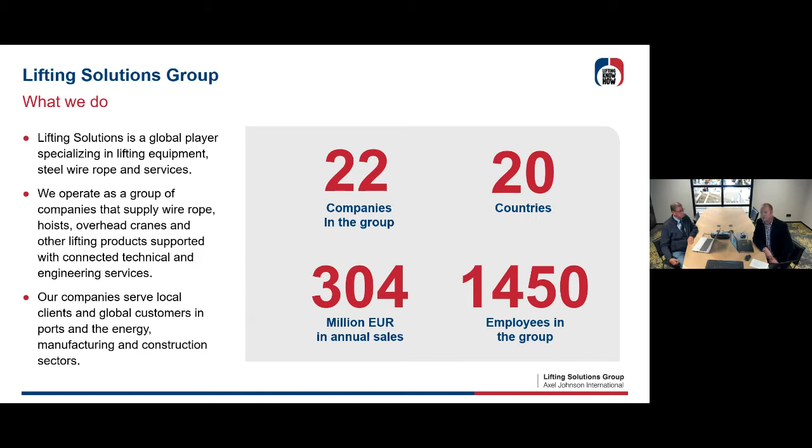Here you have some numbers. Like I said, we're a global player, specialized in steel wire rope, lifting equipment and inspection, etc. We operate as a group of companies, and we serve local clients and global customers in several industries. As you can see, 22 companies in 20 countries, etc.

Since the last webinar we increased our number of companies, and we acquired a couple of companies in Australia, 5 pieces, so we're growing and growing, and we have very good coverage, almost worldwide, on lifting solutions.

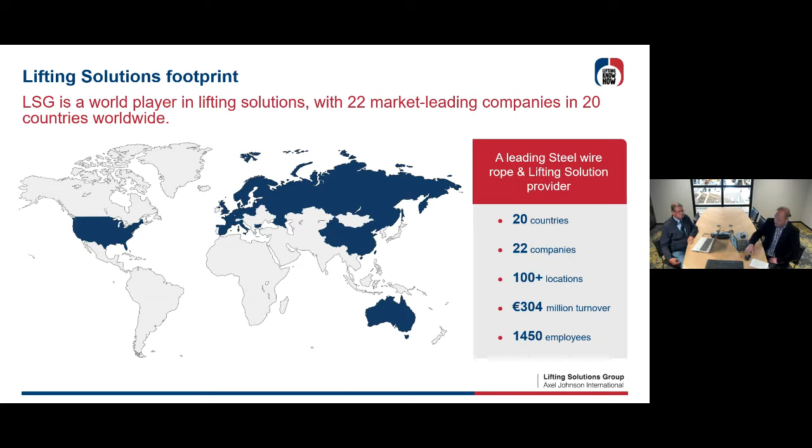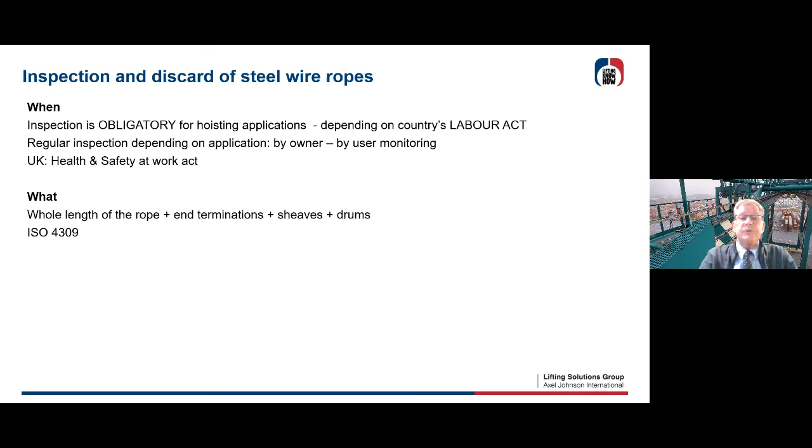Also the end terminations, he has to look at the sheaves and at the drums. And one very important lead into this is the ISO 4309. This is a standard procedure we're going to talk about for the coming 20 minutes.

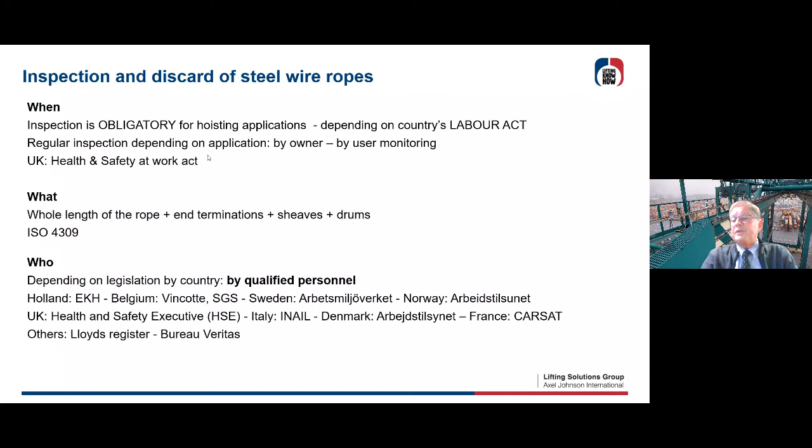Who has to do this inspection? That depends on legislation by country. It has to be a qualified person who knows about the different discard criteria in its country. In Holland, it's EKH. In Belgium, we have Vincotte, SGS. In Sweden, you see different inspection companies responsible, also in the UK, Italy, Denmark, France, and so on. For some applications, you need an inspector from Lloyd's or Bureau Veritas. So it all depends on who is going to do the job.

Now let's talk about when. We're just reading what's written in the ISO 4309. You see requirements covering the application of the country in use. In some countries, like with tower cranes, you have to do it every 6 months or every year, and so on. It depends on which country you need to apply your discard criteria.

The type of crane and the environmental conditions in which it operates - is it a container crane or a tower crane or something? You also have to look into the classification of group of mechanisms, how many times you're using the crane, the loads, are you always going up to the maximum load, and so on.

You're going to look into previous inspections, because sometimes you have a history of a crane, so that is important. The experience from different inspections, or from comparable cranes. The length of time the rope has been in service - if you see a discard coming up, perhaps you need to move on in your number of inspections. And the frequency of use - sometimes a crane hasn't been used so often, but in recent months or years you use it more, so then you have to increase the inspection frequency.

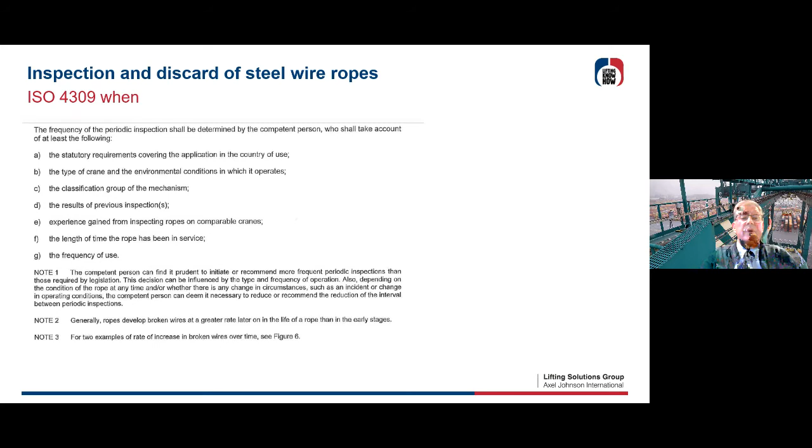So this is when. What are you going to inspect? Well, there are several modes of inspection you need.

You're going to first count the broken visible wires on the outside - this is a visual inspection, looking for fatigue wire rope breaks, counted on the outside. Or you can lose metallic area, which you can measure by visually measuring the diameter of the rope, the decrease in rope diameter.

You can also look for broken wires on the inside, but that's done later with magnetic rope testing. You look for fracture of strands, corrosion, deformation, mechanical damages - sometimes accidents can happen - or heat damage, like electric arcing that could damage the rope. So you need to inspect the whole rope length and also the terminations.

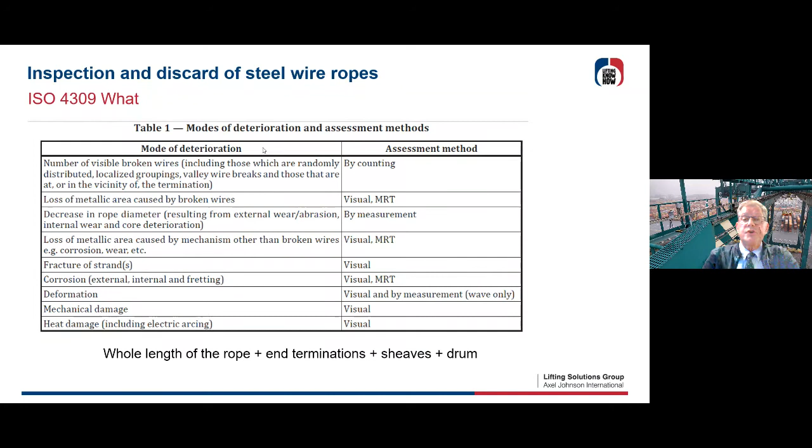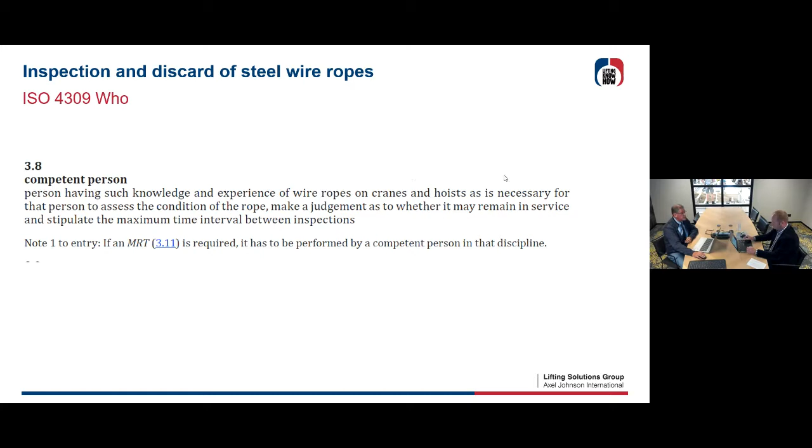You look at the sheaves and also at the drum. Don't look only at the rope, look at the whole application situation. And who does this? Once again, it has to be a competent person knowing his things about inspection, having experience, knowledge, or having acquired the learning of how to do this very important exercise in safety.

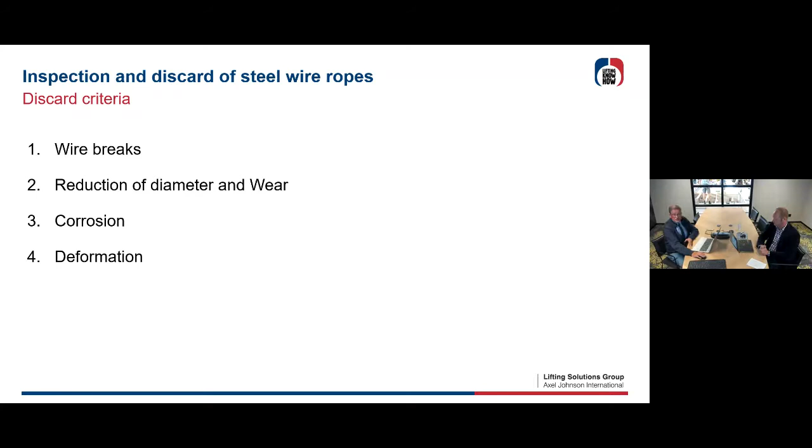Now let's talk about the visual inspection. We're going to look outside the ropes, and we need discard criteria. We look at wire breaks. Second discard criteria is the reduction of diameter and wear of the rope. You sometimes have corrosion - not often, but it could be important in some cases. And you could have deformation of ropes running around sheaves, from shocks or something. Let's look into that closer.

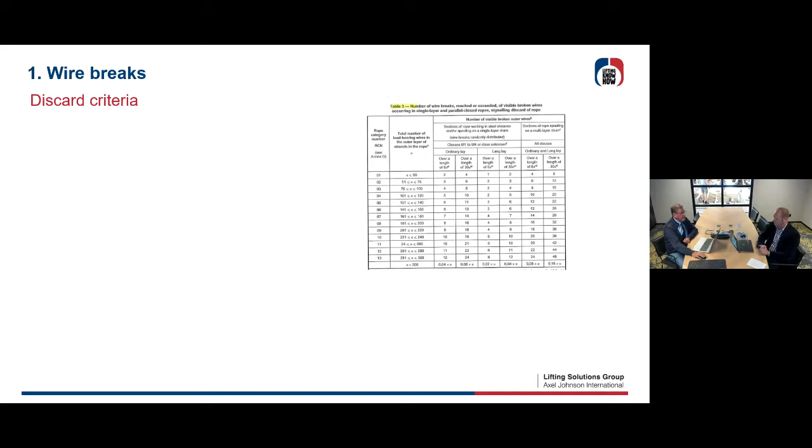So the first criteria are the wire breaks. You have a table in the norm that gives you the discard criteria - the number of wire breaks you can have in your rope before you have to take it out of service. The ISO 4309 lists two criteria: you count the number of wire breaks over 6 times the diameter of the rope, and you count the number of wire breaks over 30 times the diameter of the rope.

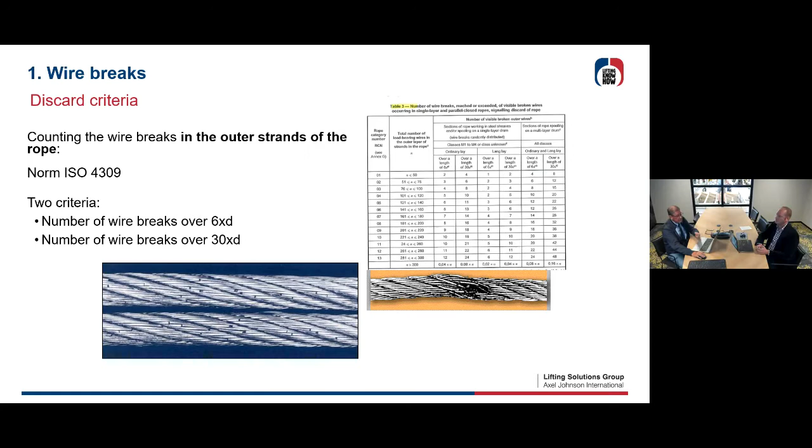But if you have normal wire breaks spread over your rope, then you just count them over 6 times D and over 30 times D.

Then you look closer into the table here, the discard criteria. On the left is the rope category number. Every type of rope is classified into a rope category number. What is the rope category number? Well, that's easy - it's the number of load-bearing wires in the outer layer of the strands of your rope.

So if you have a 6, 8, 9, or 10 stranded rope, you just look at how many wires are in the outer strands. For a 6 times 36 standard rope, you end up with 216 wires in your outer strands, so it falls between 201 and 220. Your rope category number will be number 9, so in the table you look at number 09. That's the rope category number.

The second part, the green part, is just for ropes running on classifications of applications M1 to M4, and on a single layer drum. So if you have a rope running on a single layer drum, then you have to look into the green part.

In the green part you have a classification for ordinary lay - you remember I explained what ordinary lay is, or Lang's lay. Then in ordinary lay, you have the numbers of wire breaks till discard over a length of 6 times D and 30 D.

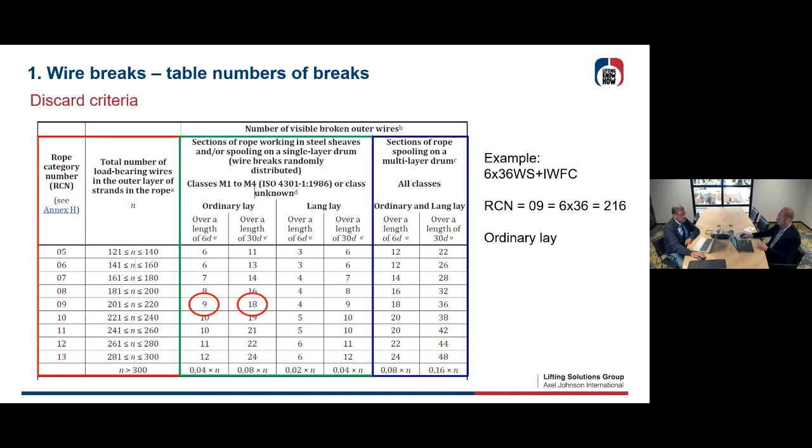Okay, so this is what has been put up as discard criteria for the number of wire breaks in your rope. There are some footnotes into this norm - you have to look into that closer.

The most important one is footnote D: twice the number of broken wires listed may be applied to ropes or mechanisms whose classification is known to be M5 to M8. So you can double up the number of broken wires before discard if you have an application with a classification of M5 to M8. You double up the figures.

Very important also - this norm is written for ropes running on steel sheaves. There is no norm yet for plastic sheaves, though perhaps someone will come up with one. So this is all done for steel sheaves.

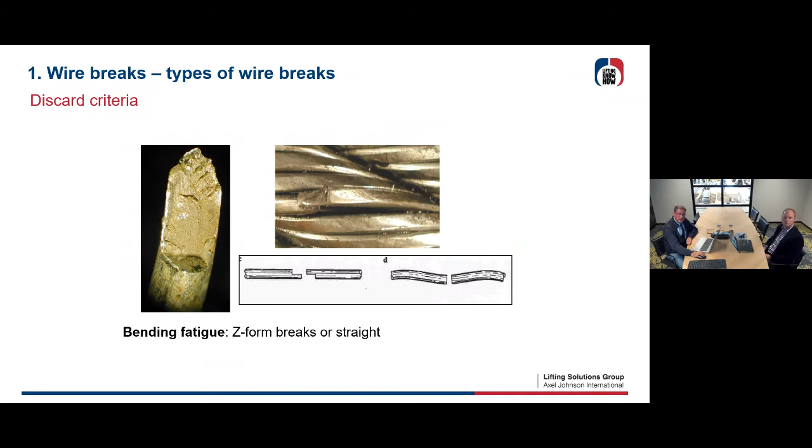So let's see about some types of wire breaks. A wire break can look like this - it's a Z kind of break. This is all fatigue.

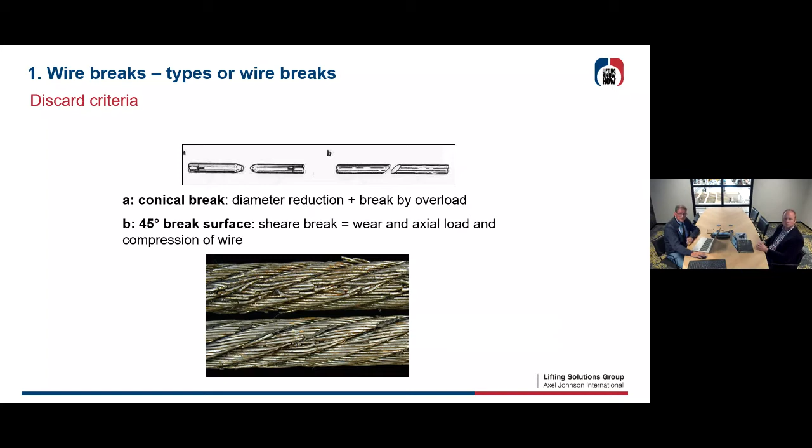It can also look like this, a conical break - in type A in the picture, that's a diameter reduction and break, which looks to us like it's due to overload. Or you can have a shear break, where axial load and compression of the wire cause the wire to fatigue and get out of norm.

Some examples could look like this - you see these are all fatigue breaks from wires. You can see some Z-formed wires, this is all normal fatigue in your rope. Also here, sometimes you see 3 in a row, so you just count them. If you exceed the number in the table, then you have to discard your rope.

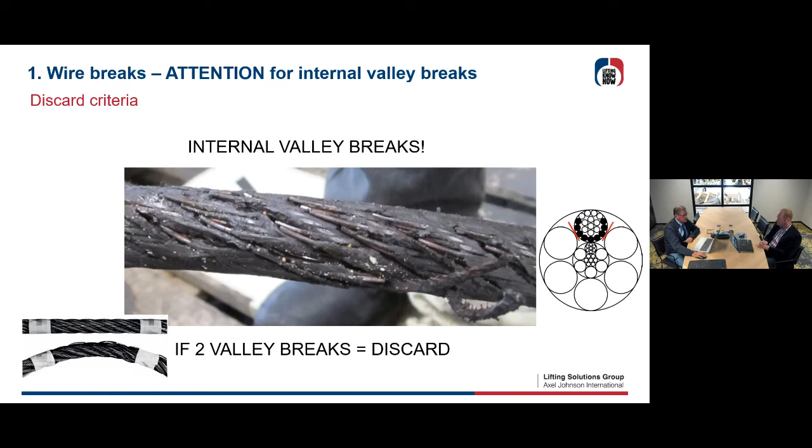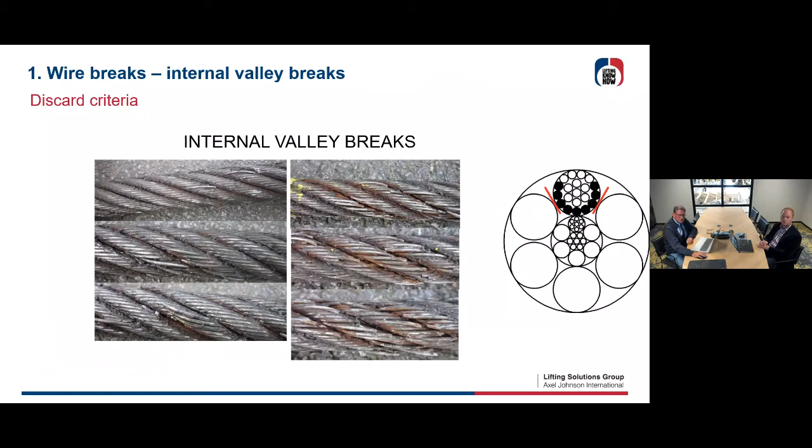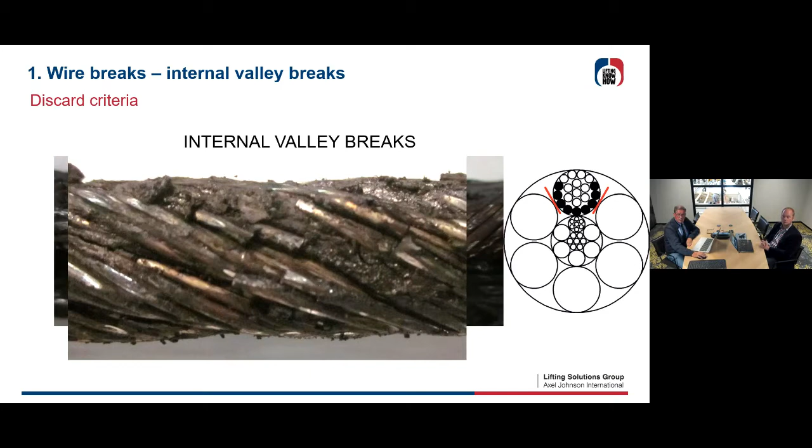Okay, how can you avoid these things? Well, we talked about it in the last seminars. You can do a type of rope with plastic infill, or you can do wires or strands which are compacted. Then you normally avoid such internal valley breaks.

Some more examples of wire breaks. Well, just be sure, it could look like that. This is a Lang lay rope, no problem with that. You see there's a lot of contact with sheaves and drums, so the more contact, the more I like it, because then you have less contact pressure, so no more wear in your rope. Very nice round rope.

Okay, it can look like this. Then you have some wear, and you see some material is gone, but the wire is still intact - no wire breaks, so no problem there.

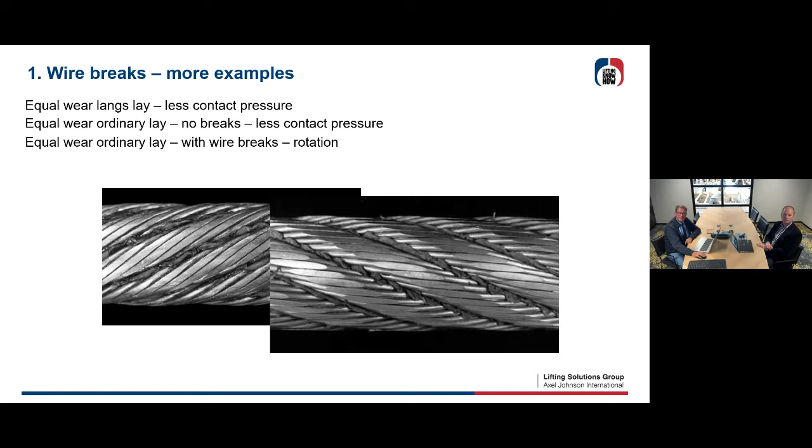And then some months later, you're going to have a wire break. Looks like this - okay, you count one, and then months later you count more, and more. Then it looks like this, and you can see in this kind of situation that there are strands which have wire breaks, and strands with no wire breaks. This could lead you to the conclusion that there is an uneven load distribution on the strands. So sometimes when you look into the type of wire strands and the number in the strands, you can investigate further to see where this is coming from.

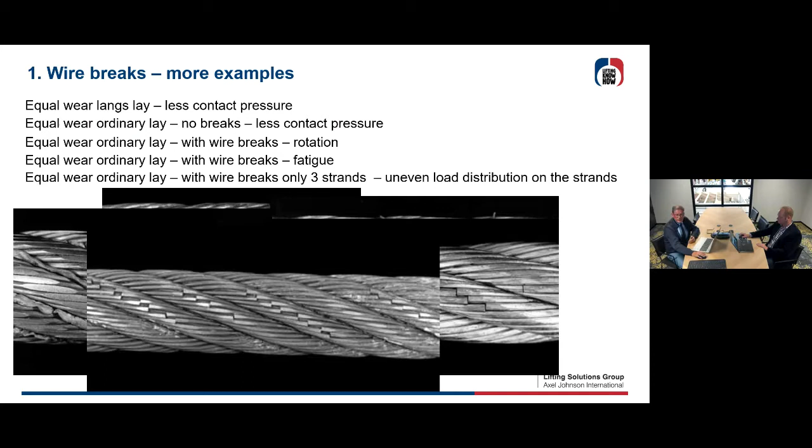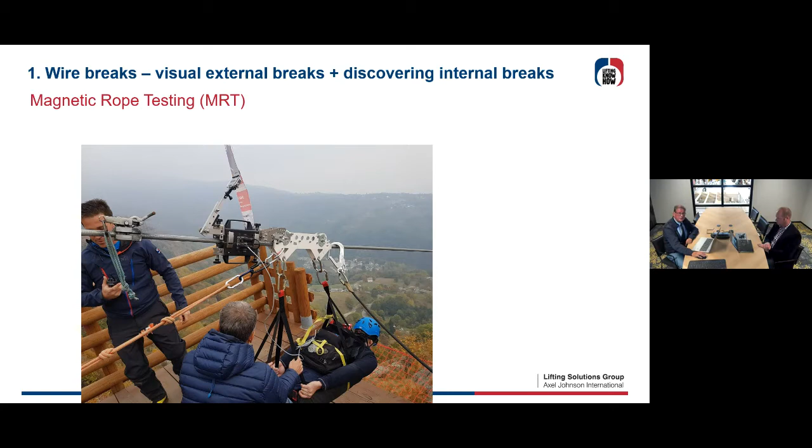Okay, that's for wire breaks - visual wire breaks at the outside. Discovering internal breaks, this is what's going to be explained later on by Bruno with the magnetic rope testing. I just show you some pictures how this is done, and then Bruno will get into this in detail in 10 minutes. Stay tuned.

Okay, second discard criteria is the diameter reduction. As I showed you, there is wear on the outside of your rope, and you can measure your diameter. If the diameter has gone under what is figured here in this table, then also without wire breaks, you need to discard your rope.

You see in the table three layers. You have single layer rope with fiber core. Second is a single layer rope with steel core, or parallel closed, so let's say a fully steel core. And the third is the rotation resistant ropes, where the core is inverted.

So what we did before was without discussion. In the old norm, it was written that if you have a wire rope with fiber core and you have a reduction of diameter of minus 10%, also without wire breaks, you discard the rope, because wire breaks will come easily. If it was a steel core rope, you had to discard it when you have a reduction of 5%. But this was the old type of ropes.

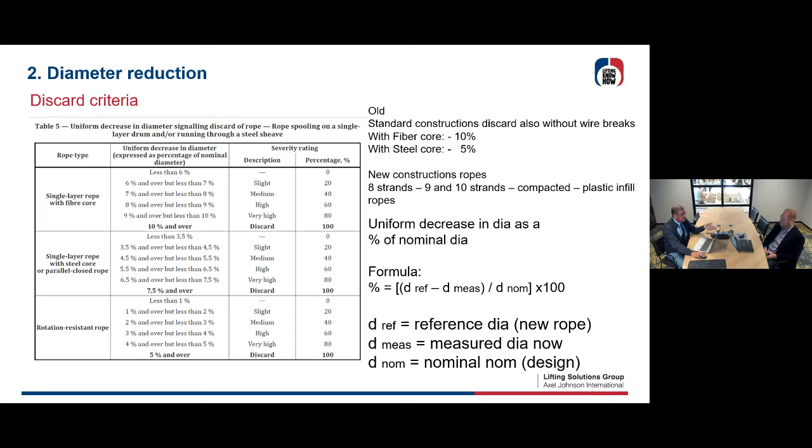Third criteria would be rusty situations. Certainly when you have ungalvanized ropes, you're going to have one of these types of corrosion. And why use ungalvanized ropes? Well, sometimes it's 8% cheaper to use a rope, but be careful, you're going to have a rusty situation in the end of your rope.

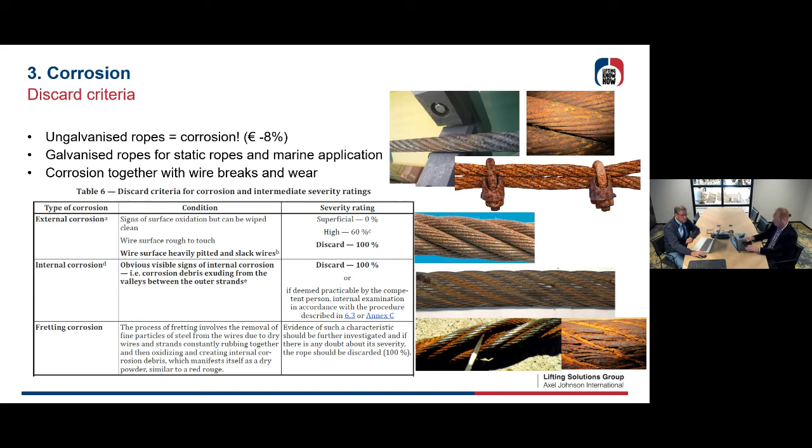These are some examples from different kinds of corrosion. You have external corrosion, internal corrosion, and fretting corrosion. Read what is written there and see some examples here. Sometimes your corrosion will end up at a high 60%, or sometimes 100%, leading to discard.

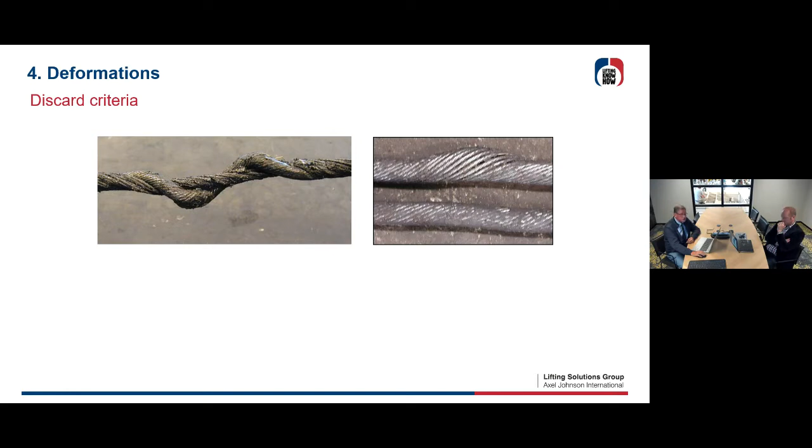We have deformations sometimes due to accidents, shocks, turning situations in sheaves, or extreme fleet angles, and then you can end up with things like this. It's all prescribed in the norm also.

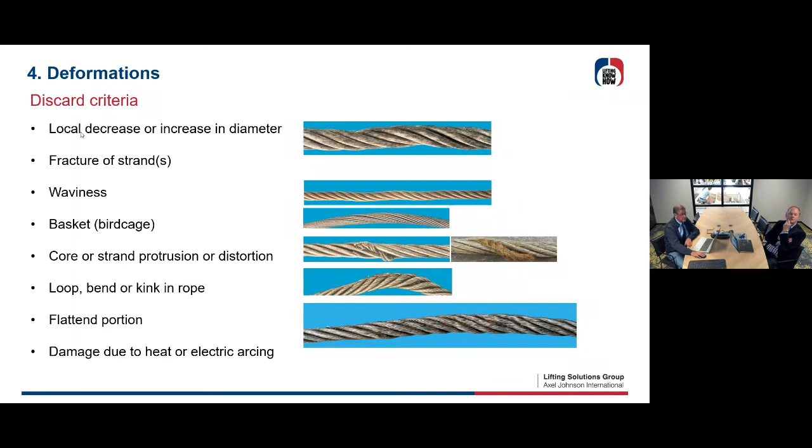We have some examples: decrease and increase in diameter. You have waviness sometimes in ropes. You have bird cages coming. Core or strand protrusion or distortion, loops, kinks, flattened portions, or damage due to heat or electric arcing. This is prescribed also, and it will lead immediately to discard.

So what you need to do now, if you've done your inspection, is add up these things. You look at how many wire breaks in percentages, you look at the decrease of diameter, and eventually, if you have corrosion, the external corrosion. You add up these percentages, and you come, as you see in line 4, to 80%.

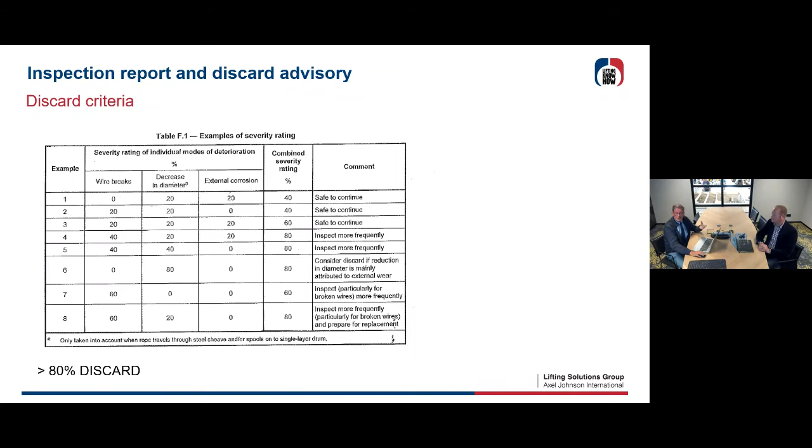And then you could inspect more frequently. If you have more than 80%, then normally discard your rope. It's a little bit, let's say, in the fingers of the inspector itself to be certain whether to go on with the rope or not.

There are two special discard criteria for elevator ropes. I'll just show you - they have their special discard criteria because it's a special application. You see there's the ISO 4344, or you have to look it up in the different countries in Europe.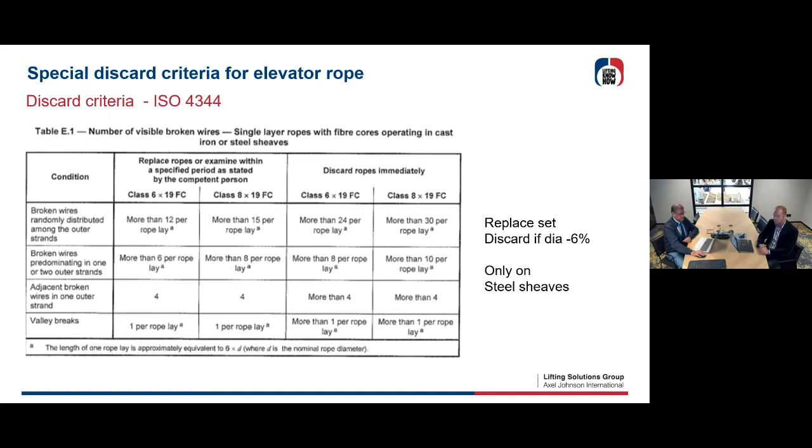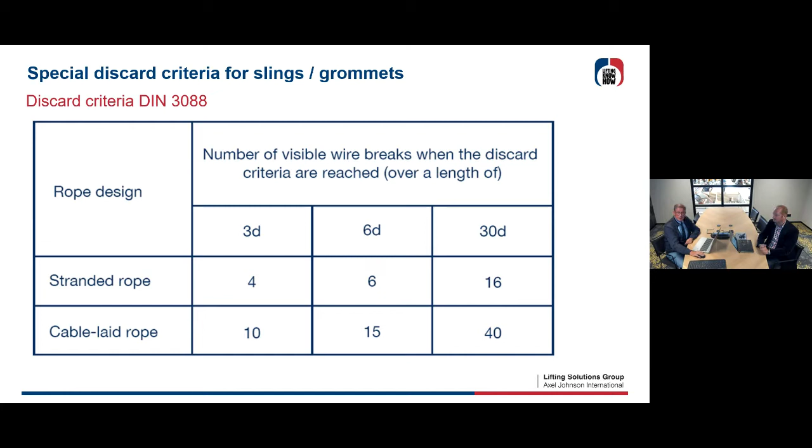Well, that's it for my part of the visual things you can see outside, and do the discard.

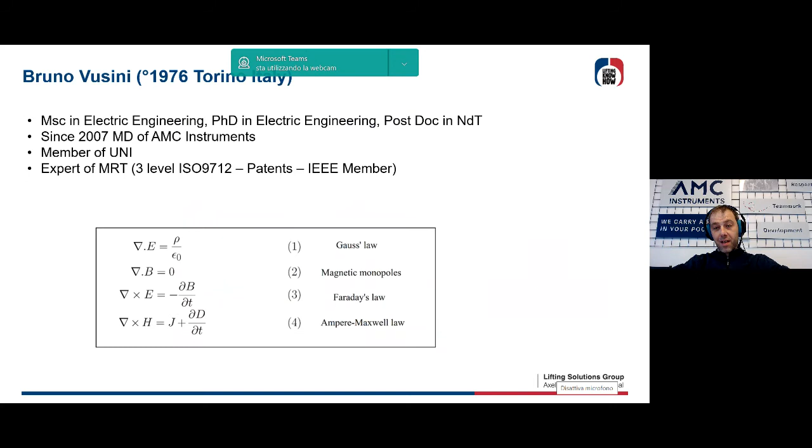It will then be up to the expert inspector to decide whether to use it, whether to open the rope locally with clamps, or whether to rely on visual analysis, sometimes knowing it will be impossible to quantify the problem. When the technician decides to carry out a visual inspection, he relies on a measuring instrument, unfortunately not always equipped with a calibration certificate, which is his own eye, together with a caliper and gloves used to touch the rope, only when the rope is stationary, of course.

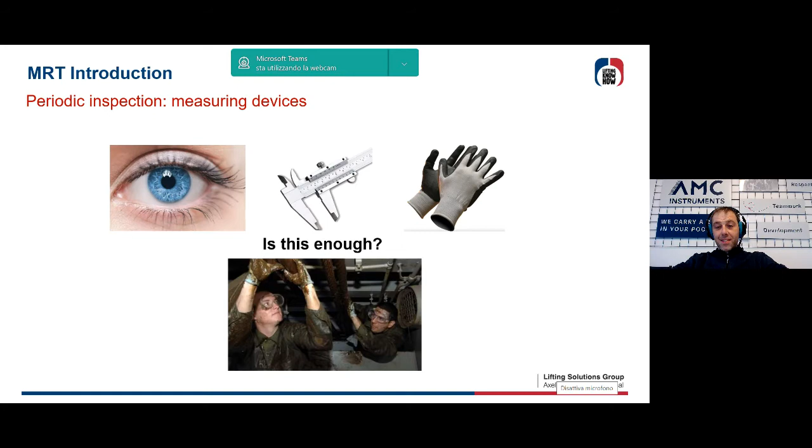We can ask ourselves, is this kind of analysis always enough? It depends. In this really interesting slide, we can see the result of a test carried out by OITAF, the International Organization for Transportation by Ropes, in which expert technicians were asked to visually detect a series of external breaks on a cableway cable. The rope was not stationary in this case, but was moving at a limited speed of 0.3 meters per second, to try to simulate real inspection conditions, since it's unthinkable to analyze the rope centimeter by centimeter by continuously stopping the plant.

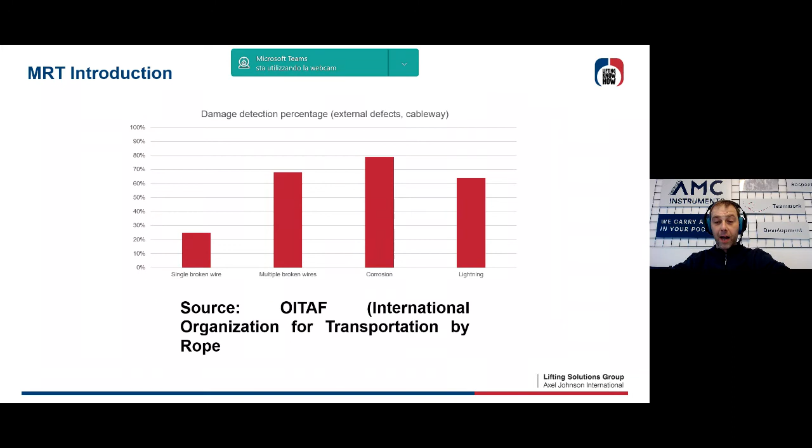We also know it's necessary to consider inspection time, and it's unthinkable for the inspection phase of a rope to last 2 or 3 days. It can be observed that on average, a single broken wire was detected only 25% of the time. This means that in a real application, 3 out of 4 broken wires may be lost. This percentage increases in the case of multiple broken wires, which are easier to detect, as are wear, corrosion, and so on. This makes us think that even identification of external problems can be affected by errors, and the human eye, as well as attention, is not infallible. Imagine carrying this out in a lifting environment with problems of space, lighting, and the presence of lubricants and grease - we will understand how difficult it can be to perform an accurate, even superficial, inspection of a wire rope.

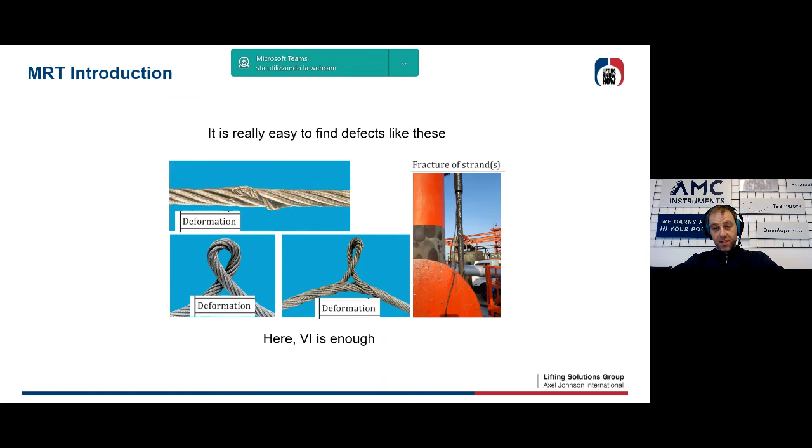When we talk about external defects, we often imagine macroscopic problems like those indicated in this slide. In reality, when we encounter this kind of defect, the rope is already in a really dangerous condition, and it's necessary to replace it immediately. This is not what we are looking for - we need to identify breaks before they turn into a high risk situation. When we operate in real environments, we are often dealing with lubricant, which limits the possibility to visually see breaks on the surface of the rope. We are also called to identify valley breaks, which, as Alain mentioned before, are really, really dangerous.

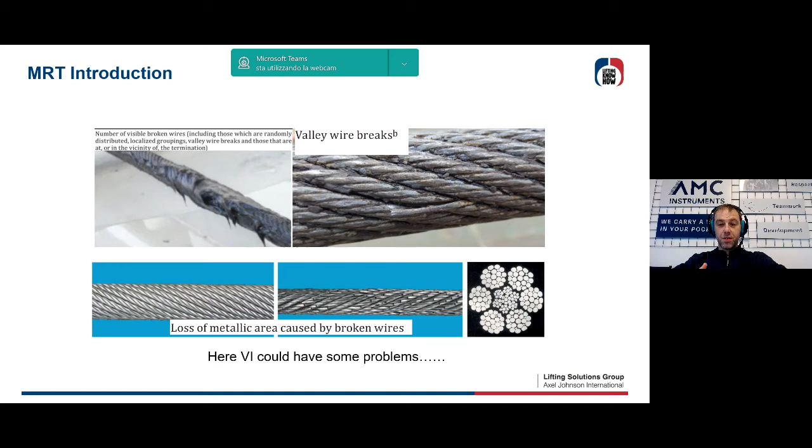As Alain told, if we find 2 valley breaks in a 6d length, we have to change the rope. Furthermore, we often operate with non-rotational wire ropes, for which it's known that most breakages are internal. In this case, when we observe problems from the surface, it may already be too late. So there are many cases in which pure visual inspection begins to become not enough, let me say.

This is the reason why it was decided to introduce in the ISO 4309 standard the possibility to use a methodology called MRT, which stands for Magnetic Rope Test, able to help the inspector in the difficult search and assessment of damage. This methodology, in addition to being already mandatory in some cases, for example in the ropeway sector in some countries, is absolutely mandatory, and is claimed by a series of international and local standards, and is globally known.

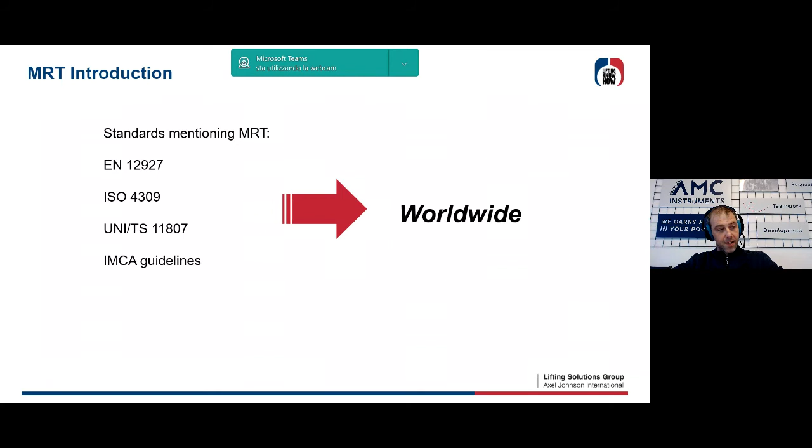Here we can see a short video that illustrates how the methodology works. So here we can see a tool, a magnetic rope test device, in this case for ropes up to 65 millimeters in terms of diameter, that is ready to be used.

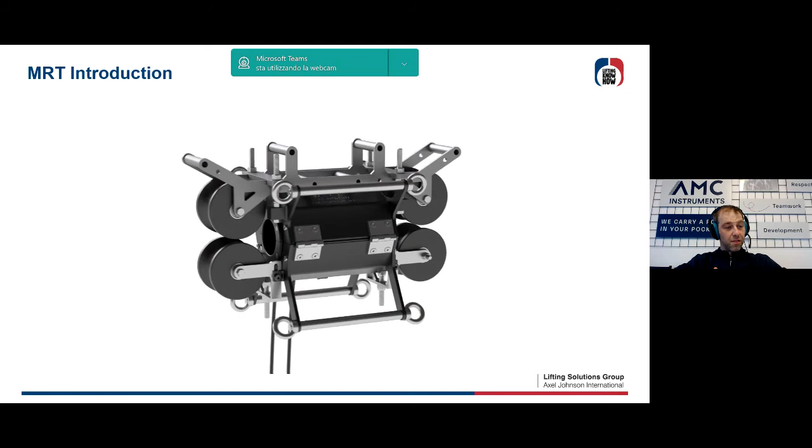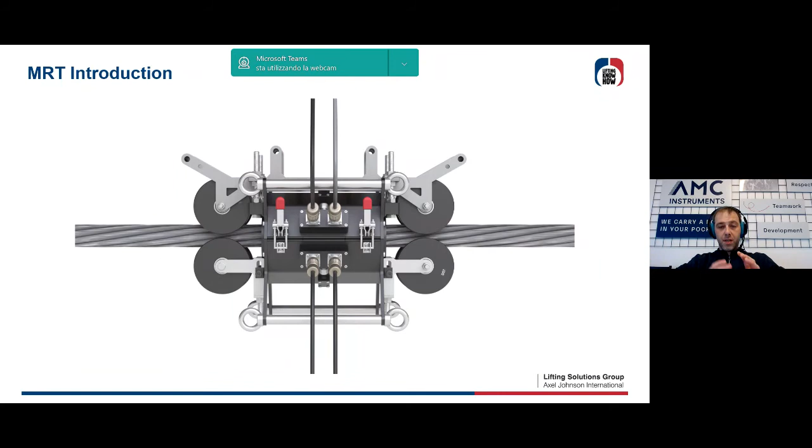Now we will see the physical principle that stays behind the methodology in a general way. The system opens, the rope fits inside the device itself, and then the device is closed around the metallic wire rope. Of course, there must be a relative speed between the rope and the device itself, so either the rope moves or the device moves on the rope. There are some permanent magnets that normally force a very high magnetic field inside the wire rope.

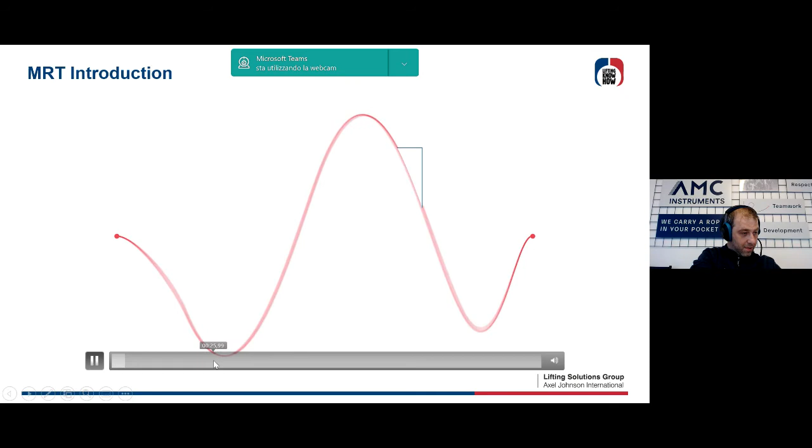When there are no defects inside the rope, all the magnetic flux moves in a certain way without any kind of leakage flux. On the diagram that the system allows us to obtain, there is only a little noise due to the fact that the rope is not a cylinder, but is made of strands.

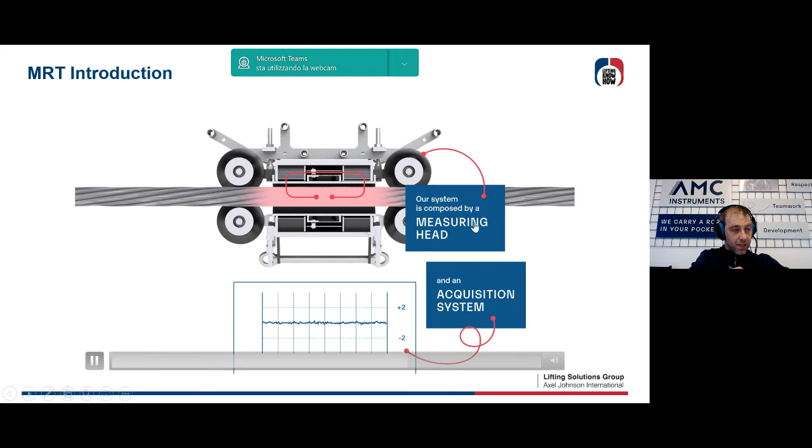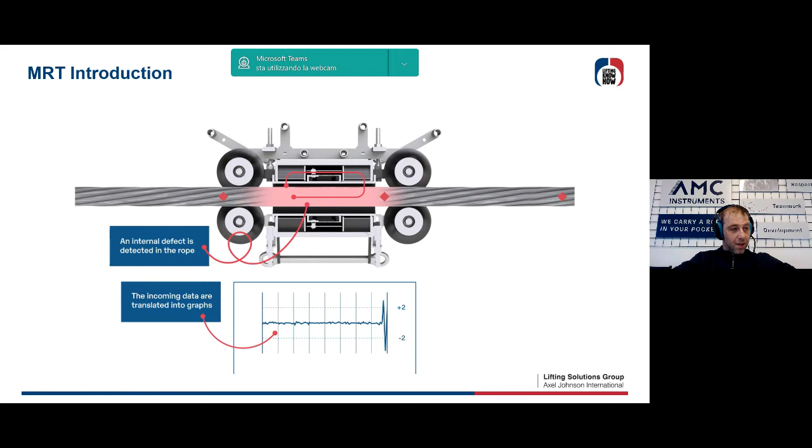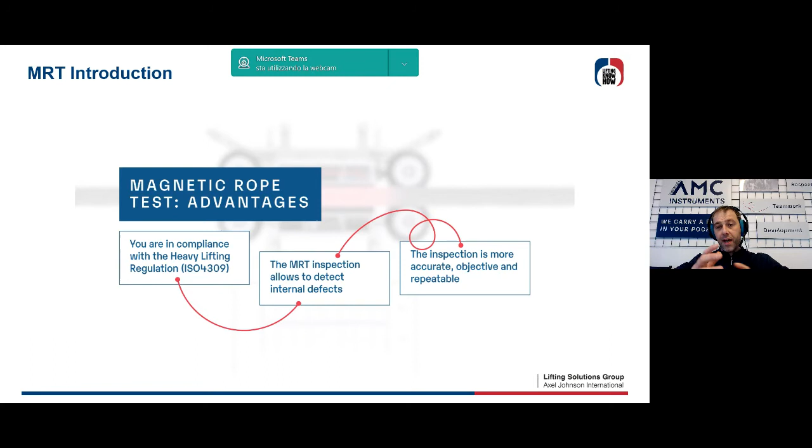So now, when a defect appears, as we will see after, on the right part of the rope there will be a deviation of the magnetic flux lines, as you can see from this picture, which creates a certain signal on the graph. This signal is used by the expert operator to identify broken wires, corrosion, and something like that.

Of course, as with any other measurement system, the MRT is subjected to international regulations. In particular, there is a regulation named EN 12927 that defines an acceptance criterion, which consists of the ability of the system to detect internal defects characterized by a very, very little section variation. In general, this section does not exceed 0.5% of the total section of the rope.

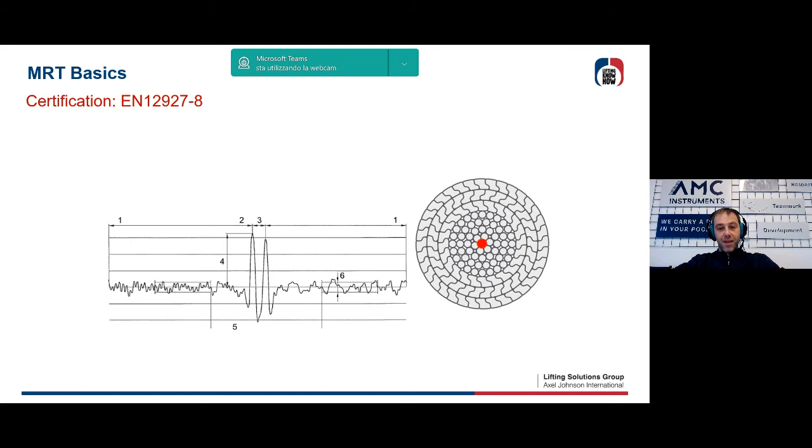It is essential, from my personal point of view, that the technician who decides to use this technology does so with certified devices. Although this is not strictly mandatory, if we have to be honest in our environment, we have to be sure that the system is able to recognize internal defects too. This is absolutely important. Coming back to the methodology, the output of an MRT system is a graph, which must necessarily be interpreted by an operator.

Of course, the ISO 9712, the regulation behind the NDT methodology, defines the requirements of personnel involved in a non-destructive test. It would be good, although this is also not strictly mandatory in the heavy lifting sector, to have such certification, because it certifies our degree of experience in the method. Just for reference, in the cableway sector, in some countries such as Italy, certification under ISO 9712 is strictly mandatory to perform tests on the cable.

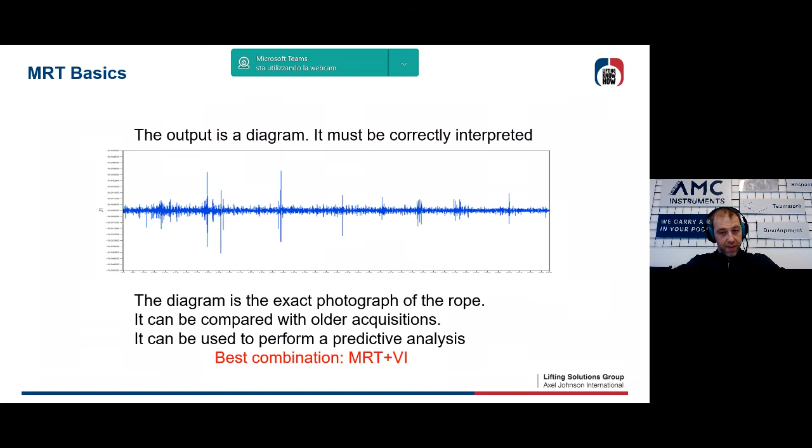Anyway, the graph obtained by the system is the exact photograph of the condition of the wire rope, and it's possible to highlight broken wires, wear, corrosion, and distortion. Everything is repeatable, so if the test is carried out by two different technicians, the results will always be the same. Everything can be kept for future analysis and compared with acquisitions made, for example, one month ago or three months ago, in order to highlight not only the presence of defects but also their evolution, because this is extremely important too.

From this point of view, the methodology is extremely powerful, and a periodic comparison with the results obtained from the previous test can be used to estimate the residual life of the rope. Through an accurate analysis of the rope status, it is in fact possible to predict when the rope will need to be replaced, increasing both safety, which is extremely important, and efficiency.

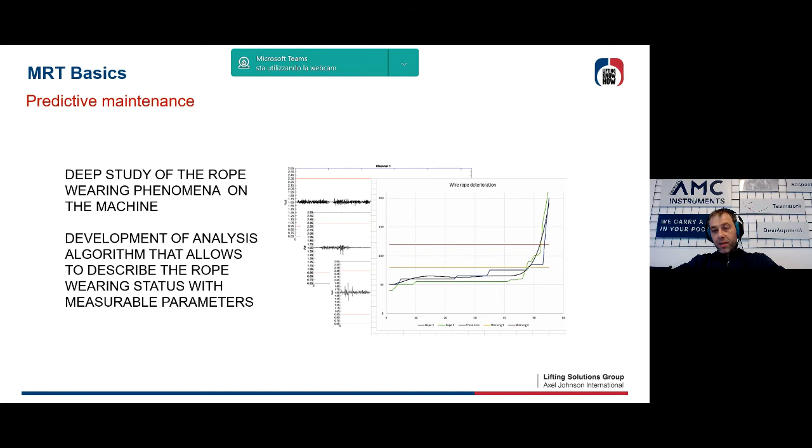Some extracts from the standard help us understand how important the MRT method is. In this slide it is noted that in the case of internal corrosion, the regulation states that without an MRT analysis, this is to be considered as subjective, and this is obvious.

In the same way, emphasis is placed on the fact that when we talk about non-rotational wire ropes, there is the possibility that most of the defects are internal, so an MRT is strongly recommended. The expert inspector will take responsibility for accepting these recommendations or not, justifying himself from time to time with his own technical, scientific consideration.

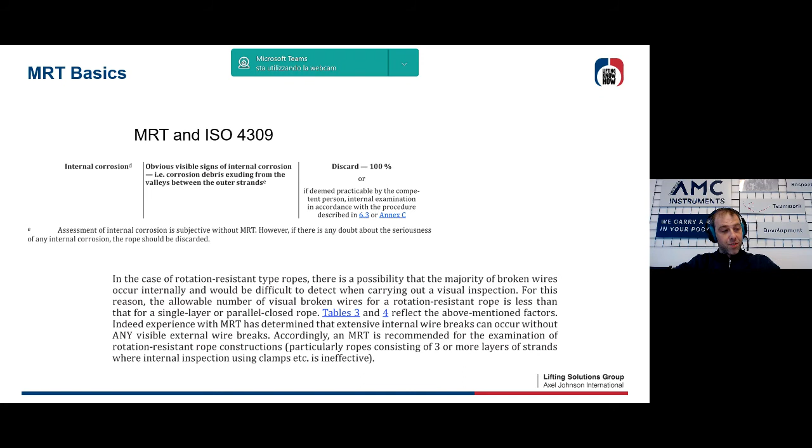This slide is interesting because it describes the old procedure that the regulation suggested up to the previous version. This is the procedure for opening a wire rope through the clamps. This technique was the only one available in the previous version of the standard, and today it is indicated only if the MRT is not possible.

The same standard emphasizes that this practice can be harmful to the rope, as can be imagined. I never tried to open a 64 millimeter wire rope when it is in operational use, so it's also not physically feasible sometimes.

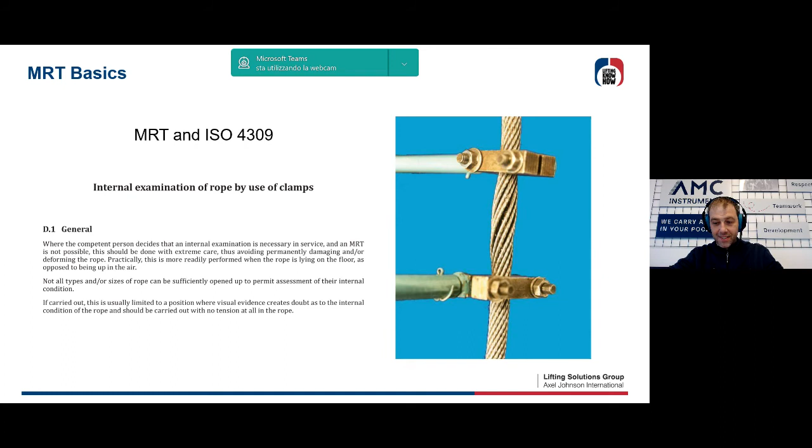Of course, after introducing the methodology, the standard also introduced a reject criterion, a discard criterion. In this case, the discard criteria is in terms of loss of metallic area detected by a correct interpretation of the diagram.

As can be seen, the indicated values are higher than the ones found in the case of external defects. This is obvious because through the MRT method it is also possible to detect internal breaks that can be combined with external ones, giving a higher number than only external defects.

Just some words that are absolutely important: the best technique available today for the analysis of the rope is the combination of visual inspection and MRT inspection. In recent years, after this standard was released, and in this new version, we have seen a kind of competition between these two techniques.

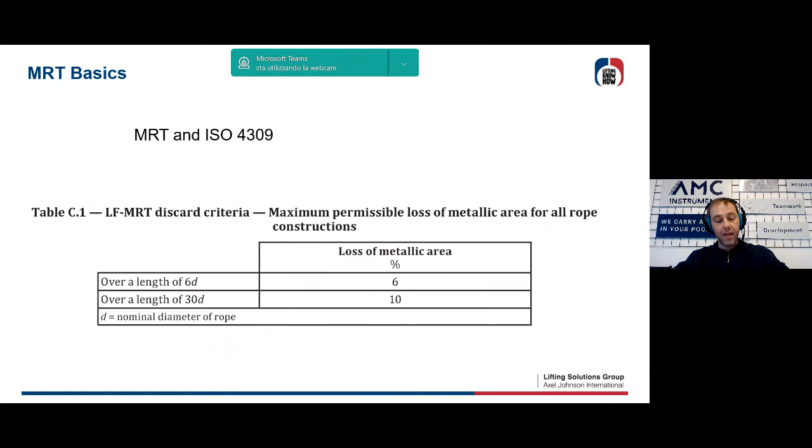Someone said that MRT was the only and best technique. Someone else says that visual is the only and best. There must be no competition, but collaboration. Visual alone has a lot of limits, and magnetoinductive alone has its own limits. The combination of these two methods allows you to have full control of what is happening and to fully and clearly analyze any kind of problem.

Just a couple of examples. Here we were in an offshore environment with a non-rotational wire rope that was externally perfect, with no external defects. We found this graph, shown in this picture, which reveals that this rope is completely broken inside.

So we removed the rope immediately, and here we can see the results of a breaking load test. Nominal breaking load 400 kilonewton. This rope broke at 125 kilonewton.

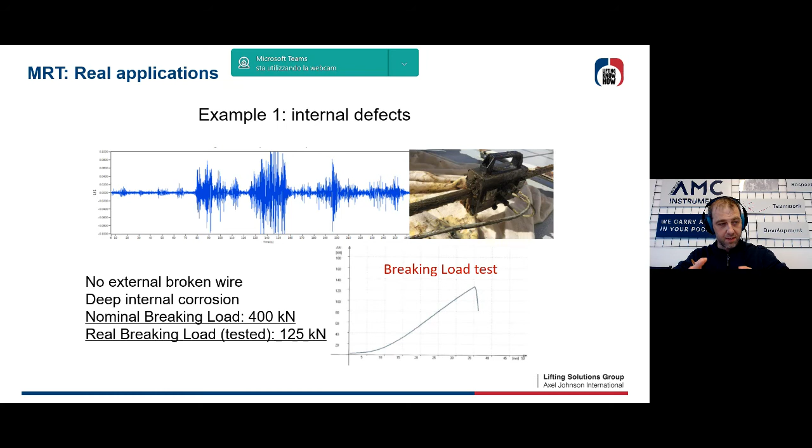An extremely risky situation. Another interesting test on little wire ropes used in a particular environment. In this case, the rope was full of broken wires, but these wires were not easily visible, also due to the fact that the rope was not easily reachable, let me say.

So by using an MRT, we can see that this rope is completely rejected, and we did it.

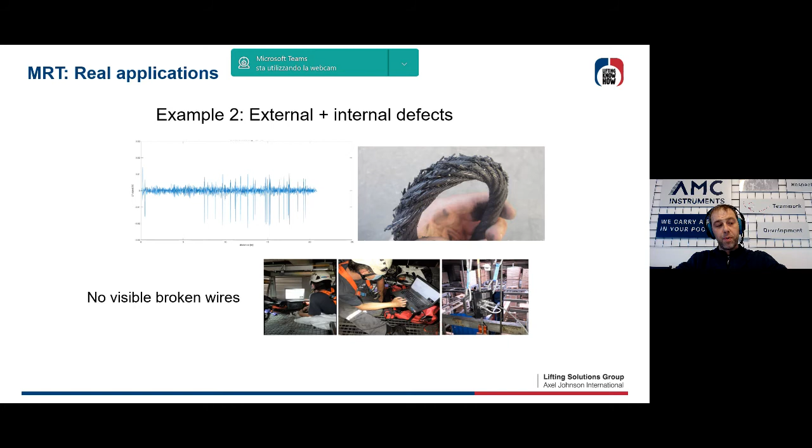As a final slide, some defects are visual defects, so it's possible to see them without any kind of problems. We identify this kind of problem by using the MRT technique. Imagine how difficult it can be to detect a little wire break here in this rope when you have to inspect 3 kilometers of rope in 24 or 36 hours.

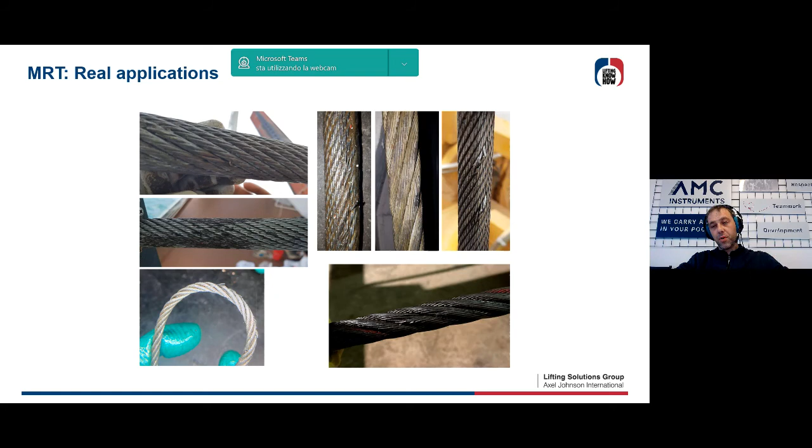So MRT is absolutely useful for internal defects, but it's absolutely useful also for external defects. Thank you very much for your attention. Michel, I leave the word to you.